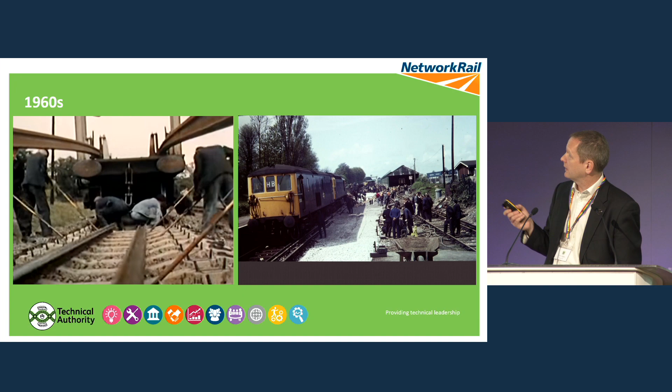Signing on cabins. Where do you think these guys - because they are guys, let's be perfectly honest - where do you think they signed on before shift? Their pub, absolutely. And I'm sure their safety record was spotless, because nobody reported any accidents.

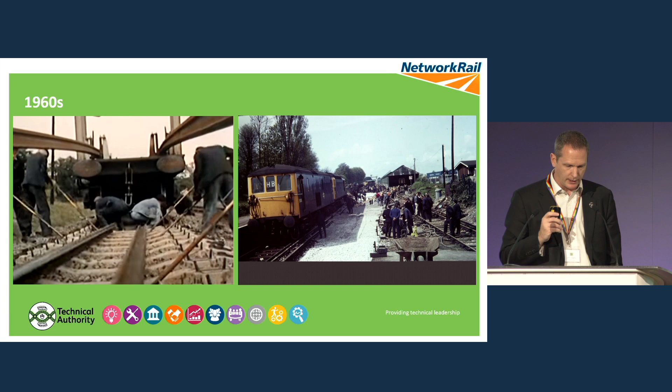So life has moved on quite a lot. Let's look at the next slide. So I particularly like the one on the left-hand side - preheating of the rails, big dirty great gas bottles. It's fantastic. Actually, there's a methodology which is still used today, largely out in Europe.

Nothing wrong with it if it can be done in a safe way. Who knows, in terms of innovation, we might consider methods like that coming back into the UK. But certainly I would feel a little bit uncomfortable about gas bottles being wheeled around on site in that methodology.

Something I'm not actually familiar with, I had to double check it, and Eric helped me out with this, so credit to Eric, thank you very much. Let me check my notes here. Pannell barrows, pictured on the right-hand side. So 300-foot rails being levered into place by this strange contraption. Pannell barrows - who's heard of Pannell barrows?

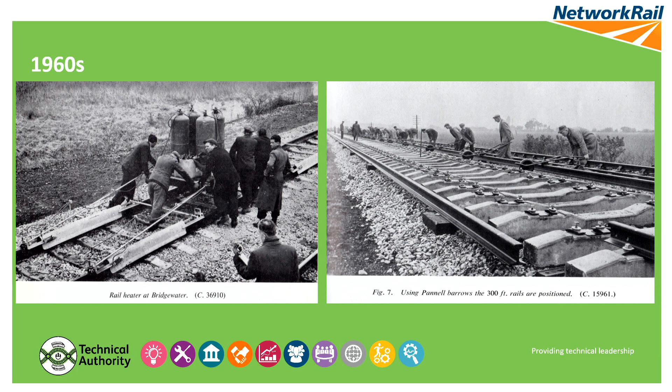Mr. Barber, were you on the shift, Steve? No, definitely not. But that's fantastic. Life has moved on, lots and lots of people out on site.

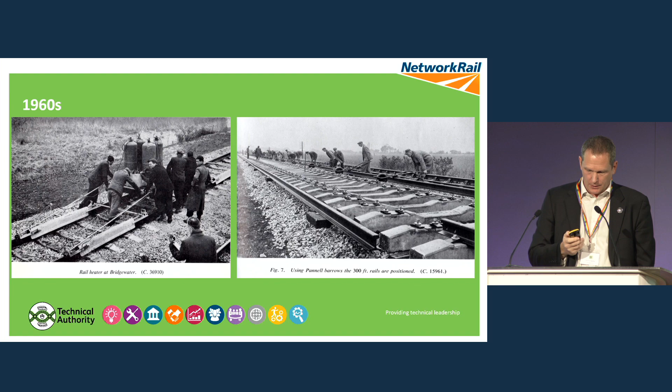Moving towards perhaps the almost modern era, and I think this is a point about innovation. The system on the railway changes, we look for innovations. Picture on the left-hand side is the flash butt welding machine. I'll be honest, hand on heart, I was quite a fan of the flash butt welder. It's a really, really good idea. Lots of potential benefits to it. Ultimately, it didn't make the cut.

It didn't make the cut because of quality control of the product, also the faff of getting on and off site and various developments. But it doesn't mean it was a bad idea. It just got to a certain point, challenged our thinking, and maybe it'll come back at some point. But it was a good idea at the time.

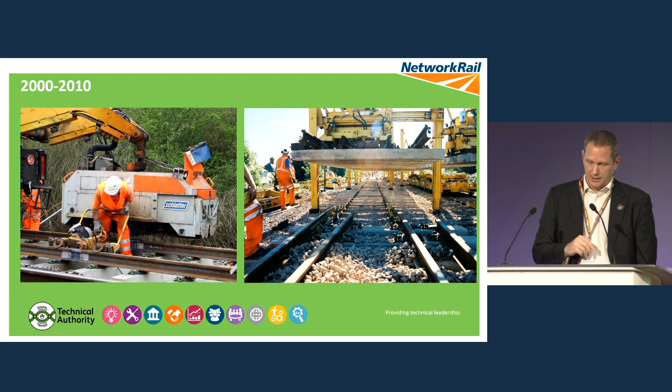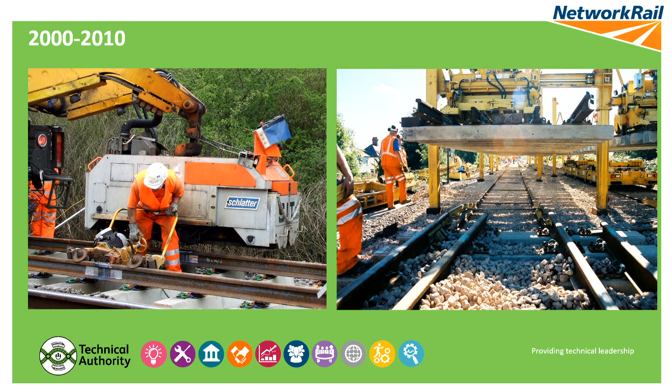And we got PEM LEMs there - I used to love PEM LEMs on site, it's a really good bit of kit. I confess I've not actually seen them recently. Quick show of hands, have we been using these recently? Yeah? Excellent. But they're a niche product, aren't they? We'd use them when we have a particular need - it depends on the methodology, it depends on the site.

So there's a key point here that tech evolves. Some continue because they provide a solution to today's problems, or some tech actually has to be paused and shelved because maybe it was a bit too soon. But it doesn't mean we can't look back again and pull it forward if it actually solves a problem for the future.

Let's look at the next one. Equipment, evolution of equipment - that's the theme I wanted to pull out here. Steam cranes - I've never seen a steam crane in real life, I love the pictures. But all of these bits of kit, maybe other than the TRM in the middle there, broadly do a similar job.

Might be clunky, difficult to get on site in various different places, but we can see the evolution. So we've got steam crane on the left, rail mounted, various other tracked steam cranes up on the top. I'll say the TRM. Who's still using TRMs? Hands up. There must be more of you than that using TRM, surely.

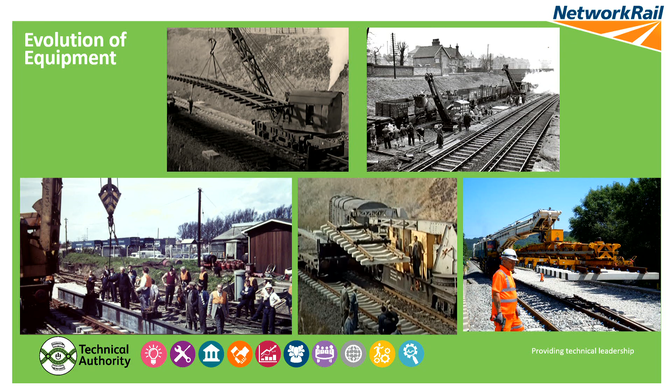Refurbished, still working, because they solve a problem. But can we do things better? And then we got on the bottom right-hand side, the Kirov - brilliant bit of kit, quality controlled, ultra safe, calculates all the various different shifts in weight to make sure it doesn't overturn. Can't say that of the steam cranes - that was down to a calibrated operator doing the right thing at the time. Sometimes it was all right, sometimes it didn't, but we've evolved our technology.

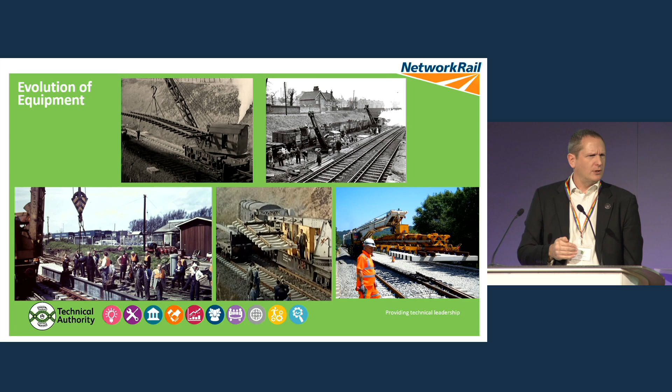I don't know if Nick Matthews is floating around here today - quick show, oh, there you are, Nick. So Nick is probably thinking there, what about the stuff that I've been proposing and road rail cranes? That is the thought process for the future. So there's innovation about how we can continuously evolve the kit that we've got. And I know Gareth's going to be talking about RD&I a little bit later on.

So what have we got next? So we consider the quality control on site - the people of yesteryear, they would have done a pretty good quality job for the requirements of their time. We live in an era now where we've got access to digital technology, GPS control for the dozers. I started with laser dozers back in the day, I used to like setting up my lasers for the laser dozers. It's moved on - GPS, tandem tamping. Let's be honest, that's not really that new, but what it does give us is a really good finished final product, doesn't it? So it helps us get line speed handbacks at the end of the day.

The AFM, bottom left, brilliant piece of kit. Again, not particularly new, but this is the kind of stuff that we still use today. And it's a tool for now, because it fulfills our requirements. I invite you to consider what the tools of the future might look like. It might be evolutions of these, or it might be something slightly different.

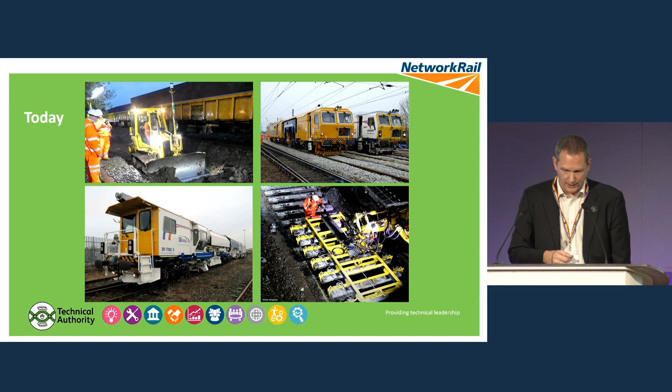And then the sleeper panel, sleeper layer there. For me, when I started, the height of technology was a 4 sleeper layer, and then that's what, is that a 6 or an 8? I think there might be an 8 in there somewhere.

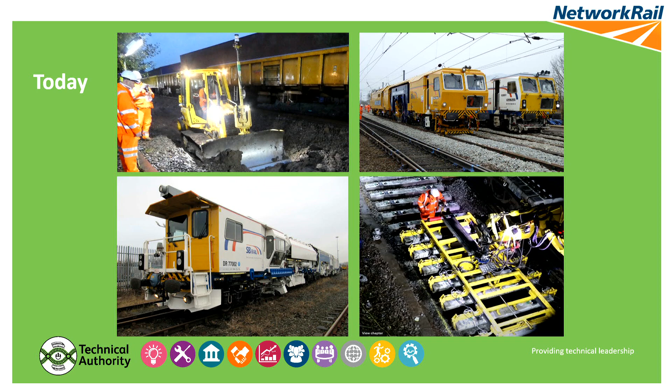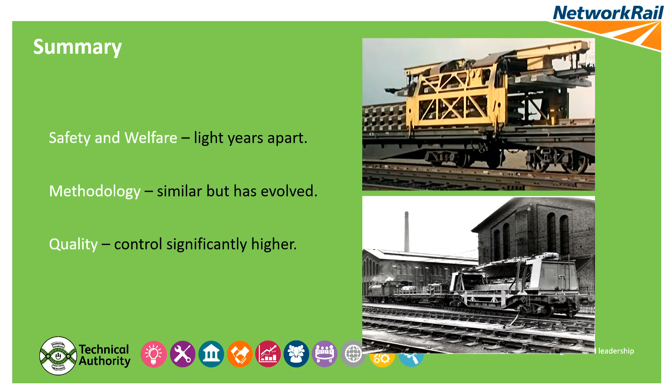So from this half of my narrative, I'll just say we can see we have gone through light years of change for the welfare of our people. We run a much, much safer work site, don't we? We really do.

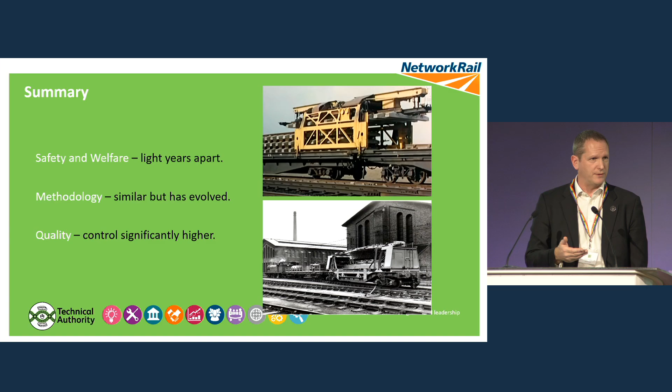I reflect, and I'm looking through the lens of conventional renewals, and maybe somebody wants to ask about the high output kit, maybe in Q&A, and I'm happy to discuss that. But the methodology is pretty much the same, isn't it? It's evolved, the kit has evolved, but the methodology of digging out or removing the track, digging out, placing the ballast, renewing the track, it is what it is. We've evolved that methodology, but what else can we do more efficiently, more effectively?

And obviously I mentioned about the quality control. 60 years ago, there wasn't such a big challenge about line speed handback, was there? Now there is. And I'll talk more on that in a minute or two.

How am I doing for time, Eric? Fine, okay.

So, when I was preparing for this presentation, I was contemplating what was the best narrative, best nuggets to pass on to you. And I had the opportunity at the Chief Engineers conference to listen to some words from Andrew Haines. And I thought, that's brilliant. I like what he said. So the next few slides, I'm just going to do my best Andrew Haines impression.

Don't tell him. Are we recording this? Yes, we are. Oh, my God.

But let's just have a quick look at some thoughts that Andrew passed on. They were quite powerful words, and I thought I'd share those with you. So let me just quickly ask, who has heard of Andrew Haines' 4 E's? Quick show of hands. Not too many of you, some of you.

And this came as a result of a question somebody asked him about, in his role as Chief Executive of Network Rail, what does he want of his engineers? And he paused and he thought, and I'm pretty sure he did this off the cuff, to be honest, and he said, well, excellence, efficiency, engagement, and endurance. These themes are quite similar to some of the things that Stephen mentioned as well.

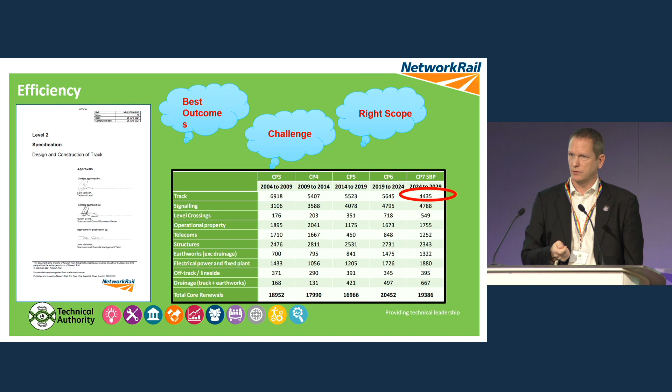So we can see for track, laser pointer's died. Oh well. See the top line for track, in terms of billions, we're around about just below 4.5 billion. Slightly less than CP6 and a slight deterioration or reduction from previous control periods. But actually, that's okay. What we have to do is recognise where the risks are for the assets. There's a positive decision for the business.

And in the round, it's about 20 billion for renewals. You see the bottom right-hand side, some of the money has been spent on other assets. It will revert to a degree in future control periods.

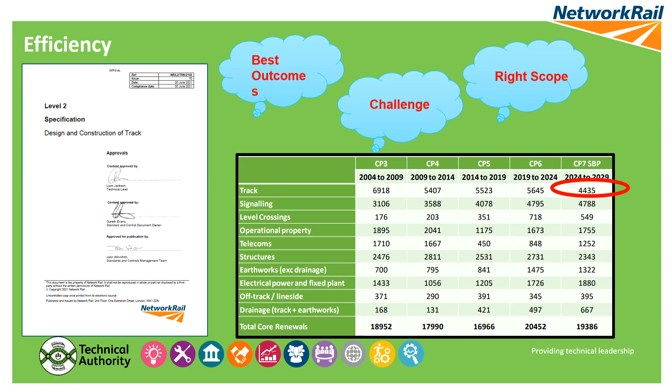We talked earlier about the potential opportunities for cost reduction. Very easy for me or anybody to stand in the front and say, work harder, be cheaper. We already would be if it was easy, wouldn't we? It's really, really hard. But that is part of our goal. We have to focus ourselves in that particular direction.

And maybe that ties back to a little bit of anxiety I've got about minimum viable product. It's okay making a decision about the minimum now, but let's understand what that means for the future. Do we accept those consequences, or are they not palatable? In which case, is the minimum viable product actually the minimum viable product?

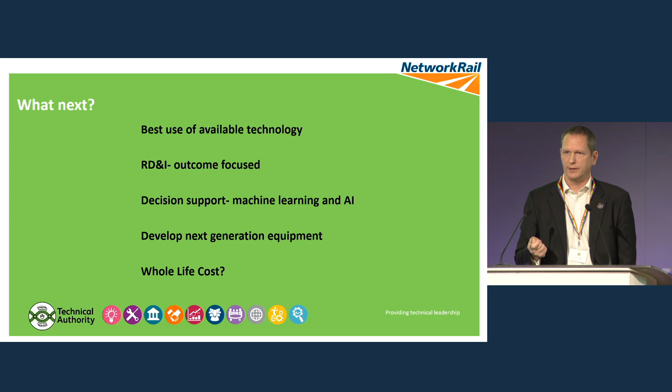There's a next generation equipment. We've seen an evolution over 60 years. What is the next generation of our kit? I mentioned stuff that Nick's looking after. Eric's focusing and working with the route services team about the kit for high output for next control period. What does that look like?

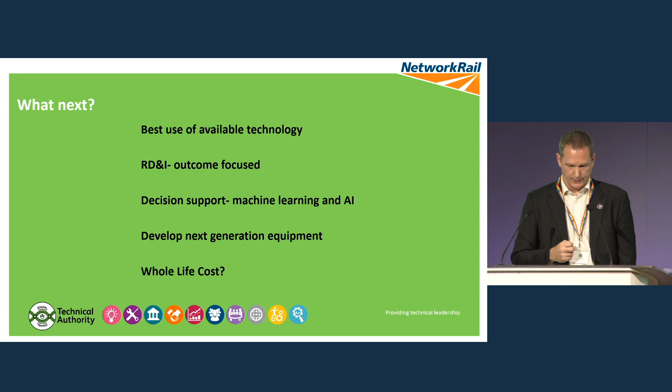And finally, whole life cost. I've said my piece about minimum viable product and whole life cost. It's massively important we make the right decisions, and I'll tie back to another theme that Stephen mentioned earlier. We own those decisions. Do not be a victim. Always challenge, but own those decisions that you make. And let's work together and get a better railway. Thank you very much, I'm done.